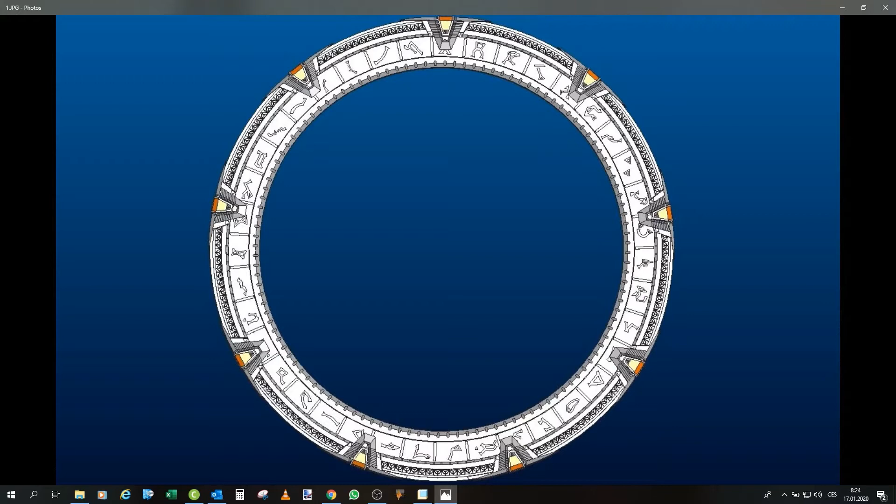In this video we will take a look at the changes that I made to the design of the gate upon reviewing the prototype that I already printed. And then we will take a look at the whole thing. Since you saw the pedestal last time, it wasn't painted, now it is. So we will take a look at it, and then I will basically tell you what will happen next. So let's go straight into it.

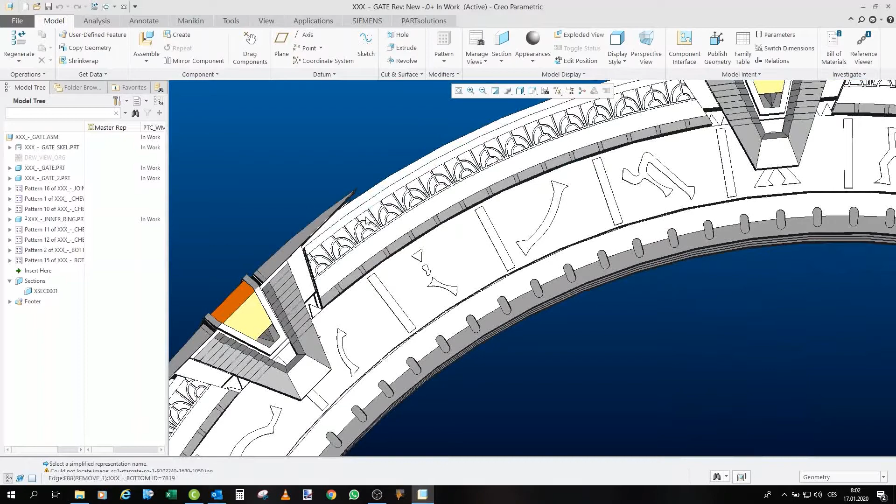Okay, so we are in Creo and we will take a look at all those changes. So first I will mention the cosmetic changes. So this panel, if you remember, here was an opening for the holes, and here as well for the pins that went through this part of the body. When I designed it like that, I didn't really know about the bridging, and that's why I made it a hole through the entire part. But since then I basically learned that it's really unnecessary, so I got rid of the holes, and now it's one single piece.

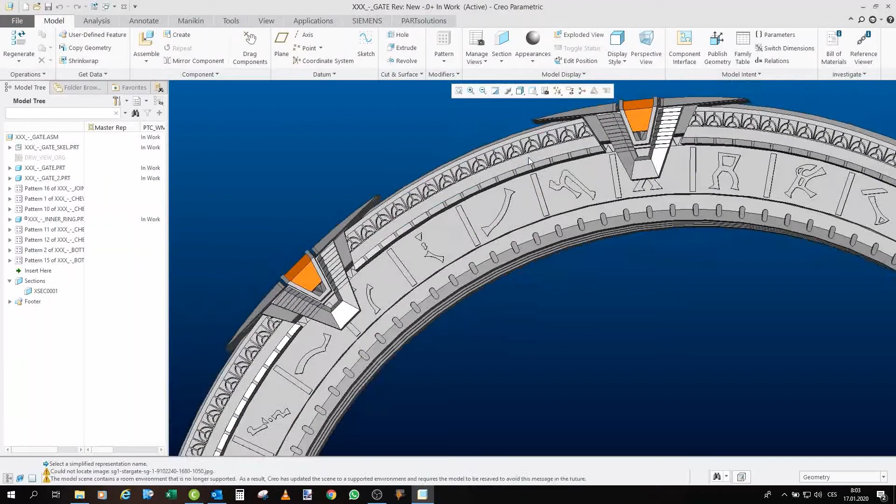The same thing goes for the back panel. As you can see here, the same thing as well. But also this part was a separate piece for the same exact reason. Now I obviously have it as one piece. So this is the first thing.

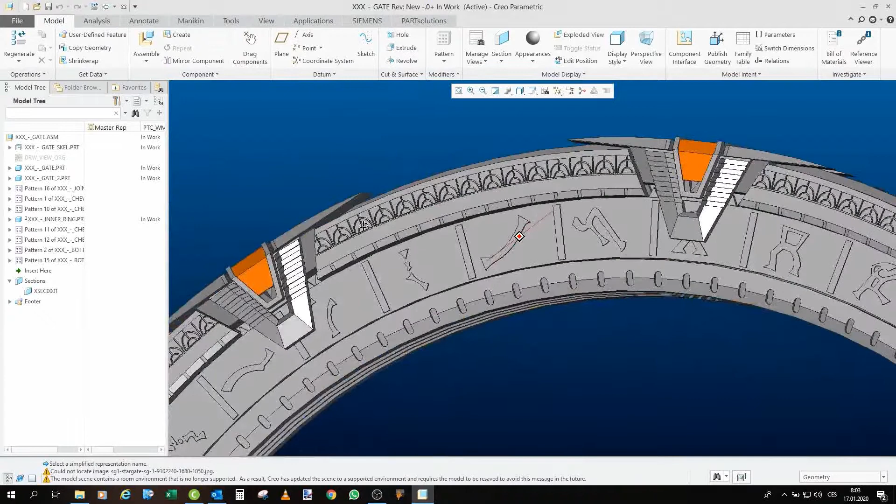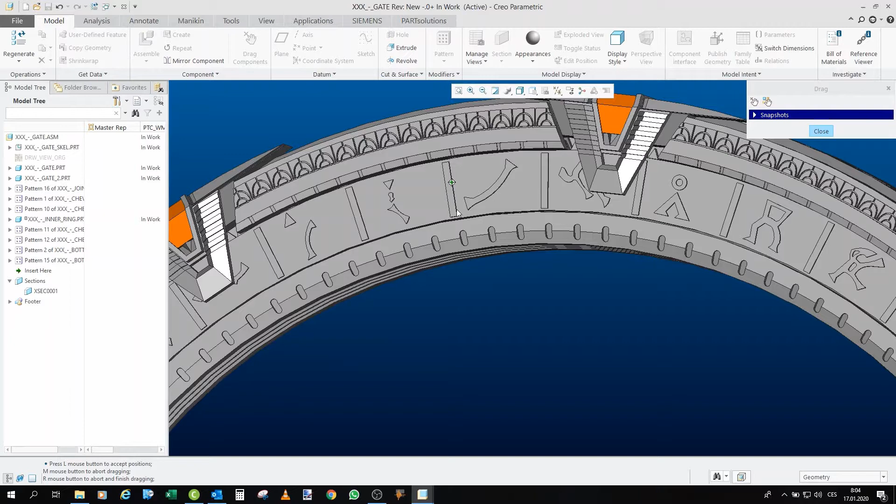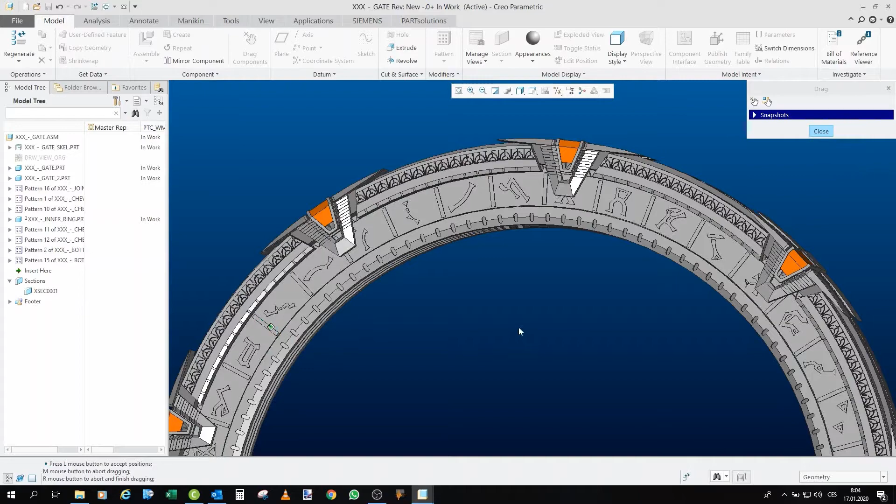The second thing is the inner ring. You may have noticed on the actual print that those dividing lines are not really there. Same as the ring on the Earth symbol. It's because in the original design the lines were so thin that they were thinner than the actual extruder head, meaning that it didn't really print them out. The sad thing is that the slicer already showed me that, but I didn't really notice it until after it was printed. So that is why there are no dividing lines and no circle on the Earth symbol. So on the next gate that I will print, it should be corrected.

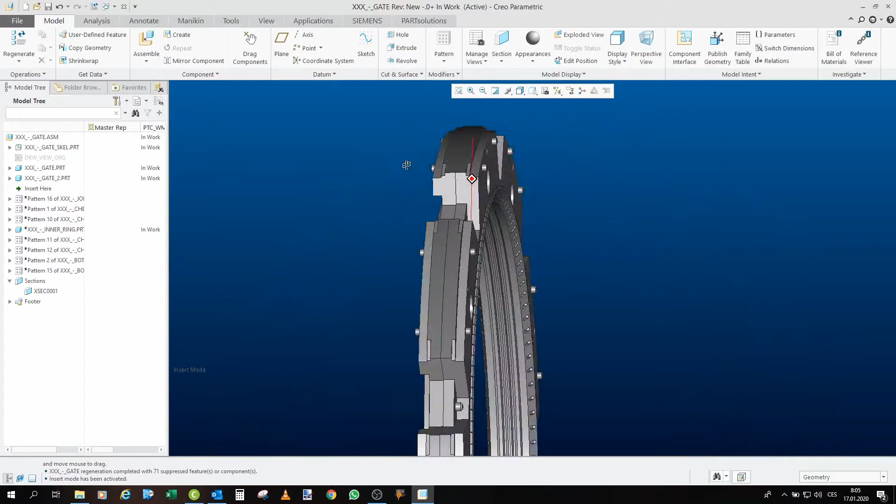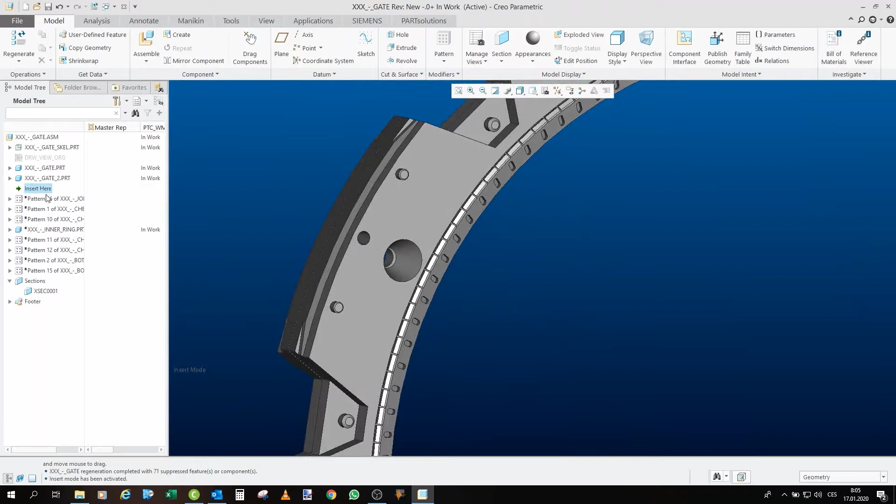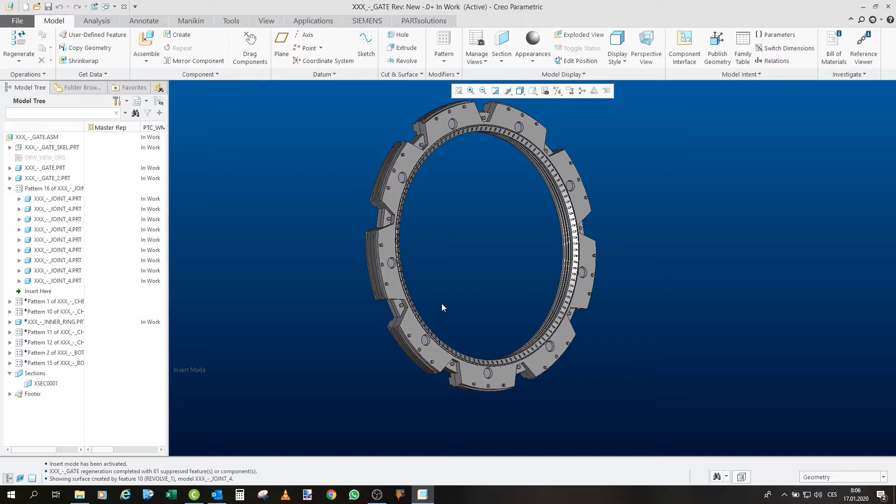So those were the cosmetic changes, and now the most important change, I guess. Okay, now we have those two halves, and this is the main difference. I prepared those conical holes here, and on the other part I did this normal hole, but with much larger diameter than before, and inside all those holes I put those new pins. The reason behind that is that the way it was designed before, those connecting rods were way too small, or rather thin, and they were prone to breakage. On this design that shouldn't really happen. So this is the new way how to put those two halves together. I hope this works way better than the first attempt, and hopefully on the next gate I won't have to use glue to connect those two parts of the gate.

Okay, so this was basically the only major change from the prototype. Everything else, as you see, is only cosmetic. So that will be all for the design, and now we can take a look at the final paint of the first attempt.